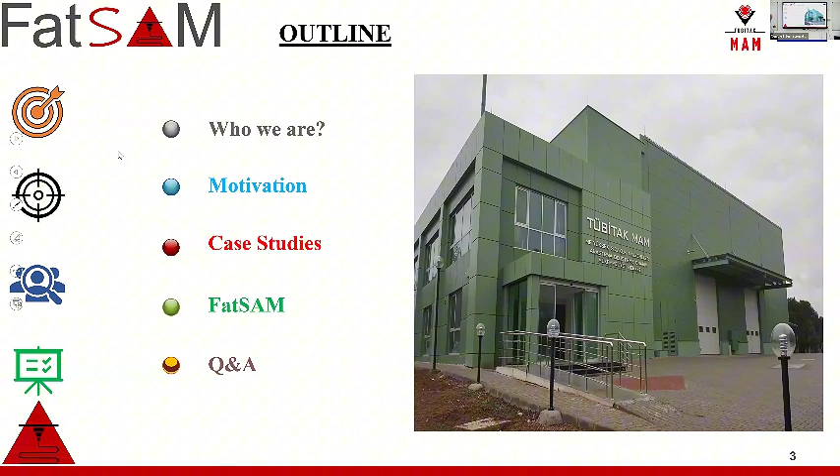So today, what I would like to present you, starting with the outline: who we are, who is the Metallic and Structural Materials Group inside the center, the motivation of this presentation, some case studies mostly in post-processing of additively manufactured metallic materials, then my final case study which I will also present in COMPLAS, and a question and answering period.

So who we are. Before our group, I would like to say that TÜBİTAK is a national research center of Turkey, established in 1972. Currently 17 active groups are working, from food engineers to computational mechanics, from sustainable economy to energy facilities.

We are one of these 17 groups, focused on metallic and structural materials, with 3 teams: casting, structural, and post-processing and characterization. The structural materials group mostly focuses on composite and ceramic materials.

The casting facilities, or casting team, is mostly focused on directional and single crystal castings dedicated to superalloys and advanced steels, contamination-free and fully controlled microstructure, and investment casting facilities at the part-based level.

What we are doing in our team, what I'm focused on, is the post-processing and characterization team: mechanical and microstructural properties of metallic materials for high temperature applications, as well as performing pilot scale production at the part level. We also provide characterization and failure analysis projects.

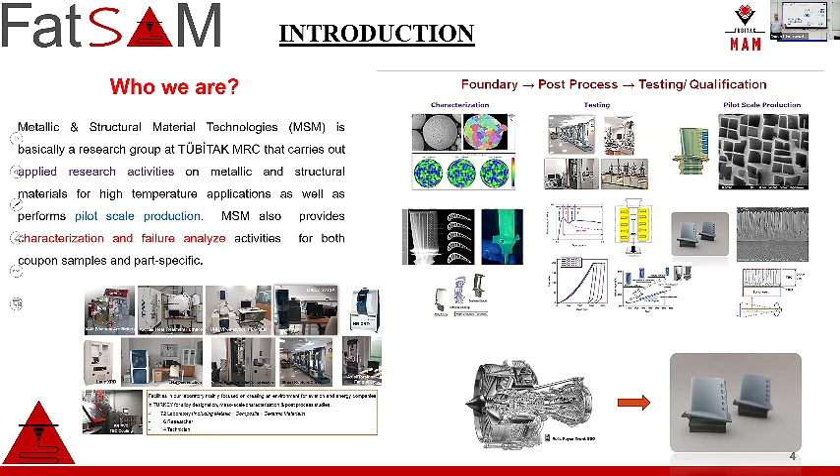Okay, just before the motivation, I would like to give a little bit of background information about what we are doing and what I will present today.

During microstructural driven thermomechanical processing, several phenomena can occur. It can be either hot deformation, or post-processing such as heat treatment and quenching, starting from recovery, reorganization of the grains, not too much change in grain formation or morphology, but release of the residual stresses. Then with further heat, we have recrystallization.

As you already know, with recrystallization we have ordered structure, fine grains, and strain-free morphology. And finally, with heat and deformation, we have grain boundary migration and grain coarsening, which can be very effective in our case for high temperature applications.

In high temperature applications, we are looking for not only an ordered grain structure or fine grains. Actually, we are looking for more coarse grains, which also prevent dislocation motion during high temperature deformation or loading, we can say.

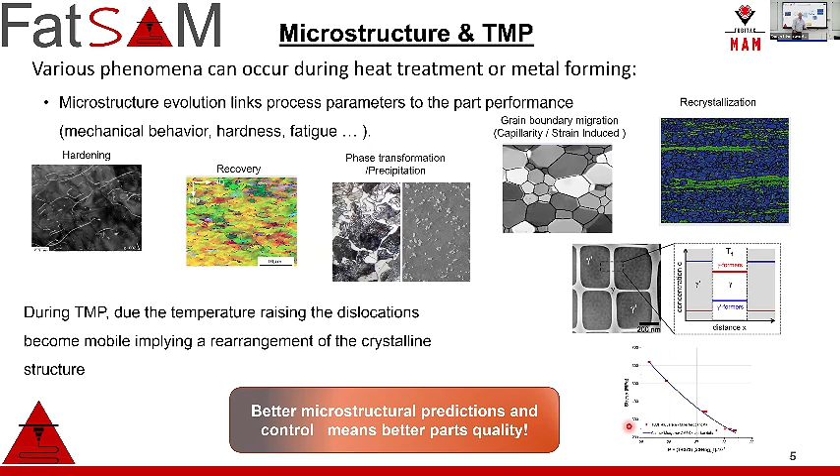So again, another background information about additive manufacturing, because all the case studies I will present today are additive manufactured samples, mostly superalloys. Advantages and disadvantages compared to traditional methods: not a vast amount of production capabilities. There are some multi-material options not available for additive manufacturing, but compared to this, excellent for complex geometries, no support material or shell needed like investment castings.

Good surface finish, depending on the material and process you selected, and post-heat treatment may be required. This is not advantages or disadvantages, but if you are looking for desired mechanical behavior, you have to consider post-treatment applications. The problem in additive manufacturing is porosity. If you are talking of thermal gradient, conventional heat, selective laser melting procedures, you get porosity, lack of fusion.

Melt pool dimensions, and microstructure inhomogeneity, which we can call heterogeneous microstructure, density, fine cellular, because like all welding or joining techniques, they have lack of fusion problems, and due to layer-on-layer powder deposition and conventional heat applying, we have some issues: localized expansion, as well as, because of the rapid cooling, residual stress problems.

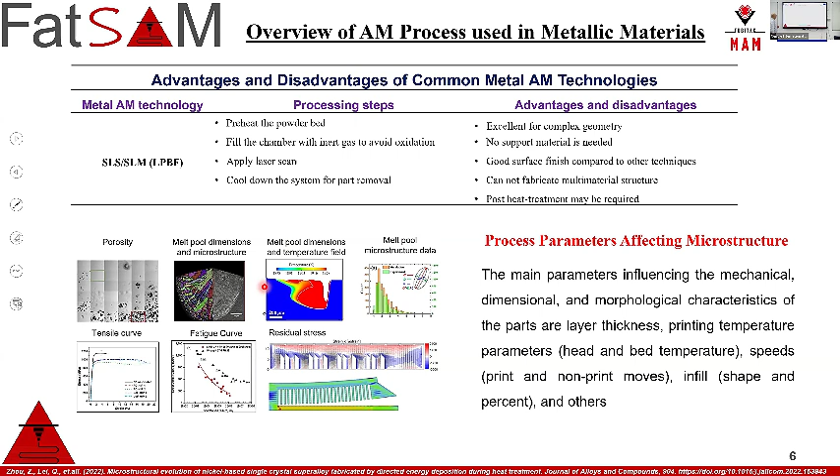So final background information, as mostly already know these things, but I would like to briefly mention creep and fatigue, two different phenomena for high temperature metallic materials. We would like to perform or qualify the materials. One of them is creep, a time-dependent deformation behavior of metallic material under constant load.

Fatigue, actually, probably most of you know better than me, is a form of fracture. You have cyclic loadings, both of them under the yield stresses. One of the most important parameters is critical resolved shear stress in the second stage of creep, because if critical resolved shear stress is higher, it means you have less plastic deformation at high temperatures, and not necessarily, but mostly, you have longer life cycles.

In terms of fatigue, it's a kind of crack formation, and depending on the cyclic loading you applied, you can figure out the moment of crack initiation, then crack propagation, and the end of life cycle.

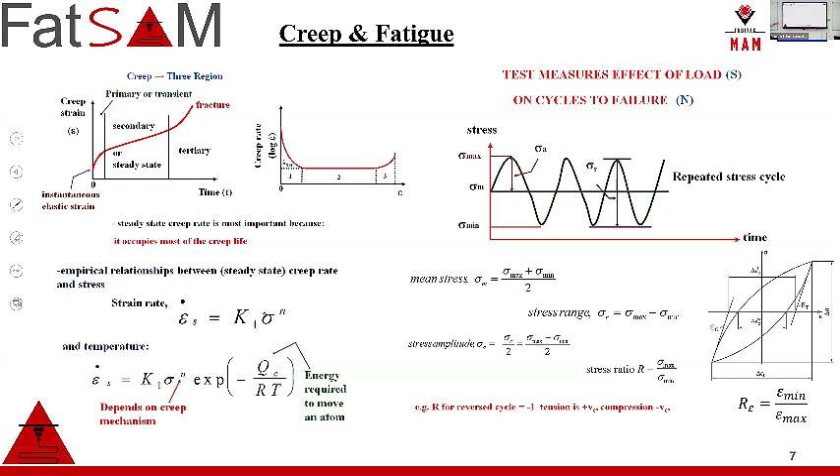So motivation of this finally comes. What we are doing, the first two case studies will be effect of heat treatment. We call this post-processing because for aviation and automotive industry, the industries we are mostly working with, post-processing means extra costs. So it is very important to design a post-processing for a particular part or a coupon sample, it doesn't matter. The first initiation of the industry will be if it is cost effective, if it is optimized.

And if we can, with these cost effective optimized parameters, obtain the best mechanical properties. So we use some thermodynamic simulations, we are expertise in thermodynamic simulations. We design heat treatments in certain cases using hot compression and torsion tests and figure out the interface times. We are also trying to do some rolling and forging process parameters. But at the end of the day, we are trying to initialize to obtain the final microstructural properties so that we can get better mechanical properties.

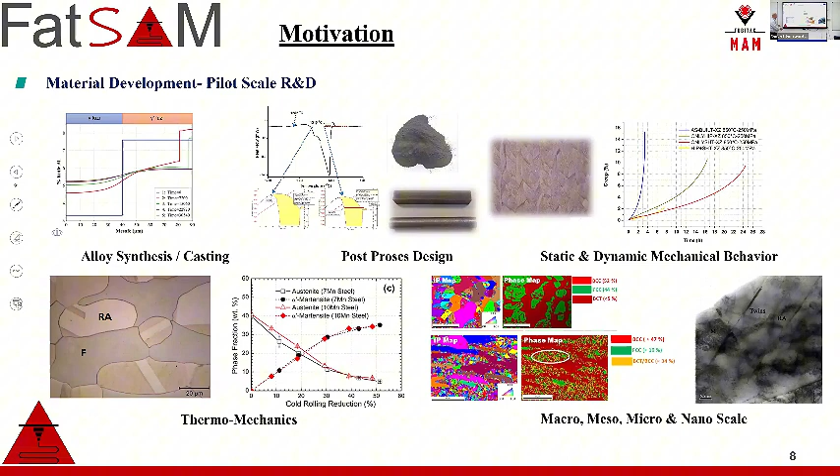So this study, the first two will be already completed projects for a certain aviation industry. One of them is funded by TÜBİTAK itself, because TÜBİTAK is not one research center. In our capital, another TÜBİTAK location we have, which is actually directly connected to the Ministry of Science and Technology, and also it's a public agency.

So as TÜBİTAK MAM, which is in a different location, if we would like to do some research innovation activities, we can also apply to our own center to get some funding, which is also connected to the Ministry of Science and Technology. The third one is European Horizon Widening Program, twinning initiation, partners with CIMNE and LTU. And the second one is actually dedicated to a kind of industrial project.

It's part of a master thesis, and it's totally focused on the heat treatment and creep properties of as-built Inconel 718 superalloys. So, let me tell you about the first study.

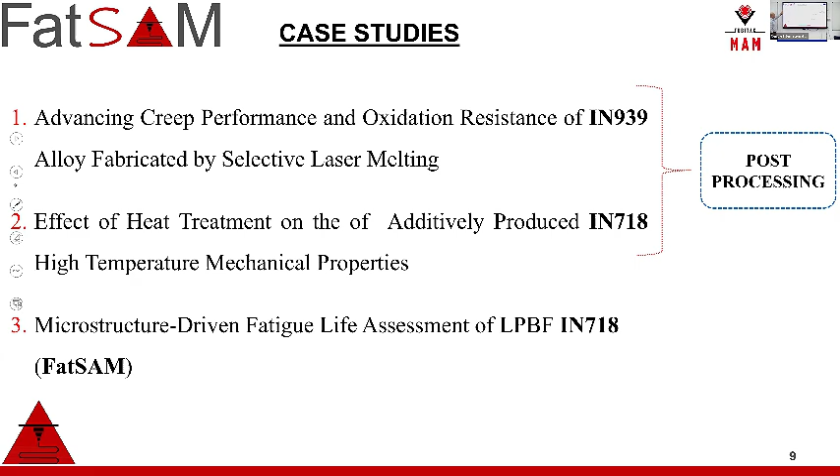The first case is advancing creep performance and oxidation resistance of Inconel 939 alloy fabricated by selective laser melting. It's a PhD study of one of our colleagues in TÜBİTAK. I will not explain the oxidation resistance part because the presentation is already long enough, so we'll focus on the heat treatment design as well as creep performance.

But before that, I would like to mention a little bit about 939. 939 is a very special as-cast material. In superalloys, in the aviation industry, we define metallic materials into two groups. The first one is as-cast materials, which you part cast with investment casting methods in a shell. The second is as-rolled materials.

You cast as an ingot, then forge, or depending on the process parameters, as roll, and finally machine. 939 in this first family is as-cast materials, and what we expect from this, depending on the usage area, NGV, which we call nozzle guide vanes, or blisk parts, is mostly service conditions under high temperatures and constant loads.

If it is nozzle guide vane, around 800 Celsius; if it is this part, around 750 to 720 Celsius. In this project, we try to obtain these mechanical or service conditions performance with additively produced materials. They are all SLM produced, selective laser melting. We have several coupon samples, rod samples, 20 centimeter length, 30 millimeter radius. Then we heat treated them and performed hot tensile and creep tests, and before that, we looked at their microstructures. As you can see, they are dense microstructures, not too much porosity.

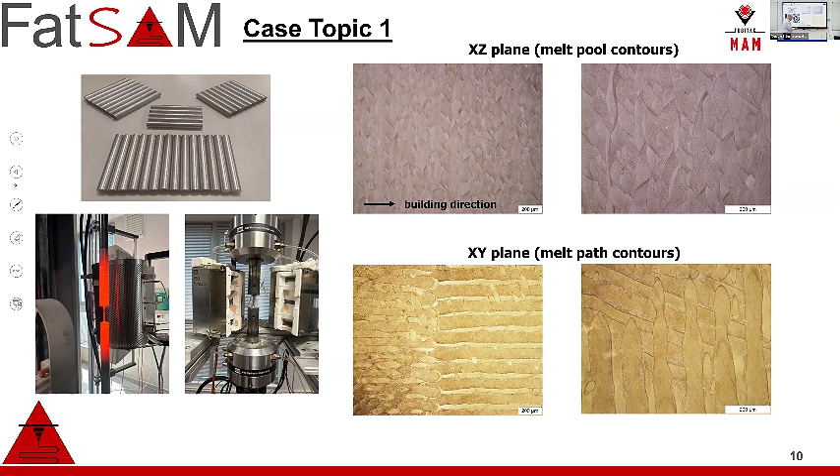So what we designed using Thermo-Calc, and some experimental differential scanning calorimetric analysis, we defined certain transformation temperatures for gamma prime formation, solvus temperature. We also did some experiments on carbide precipitation temperatures.

Three classes of heat treatment procedures: the first is HIP and aging, the other is vacuum heat treatment and aging, and the third is combining HIP and vacuum heat treatment. What is the difference between HIP and vacuum heat treatment?

HIP procedure is a kind of general standard procedure. It has recently become a general standard procedure for additively manufactured materials. It's a hot isostatic pressure equipment. As we know, the physical properties of any metallic material can change as a function of either temperature or pressure, so in this case, we apply both.

If you increase the pressure, the transformation temperatures will decrease. This is a big advantage. You will have a much more dense microstructure because of the pressure. You have ordered structure depending on the isostatic pressure and applied heat, and you don't necessarily need to reach certain temperatures because of the pressure. So it's very advantageous. But does it work?

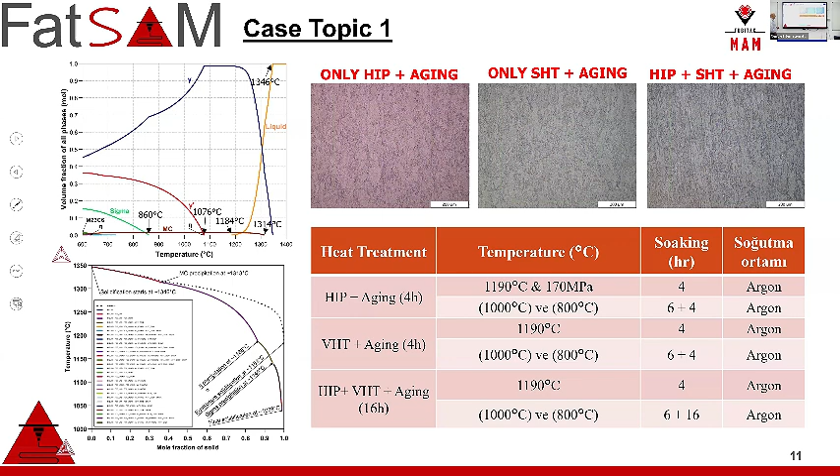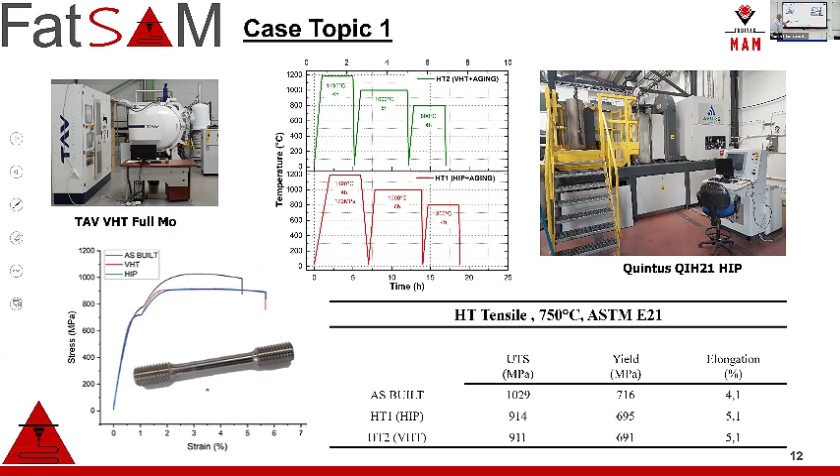So we tried three experiments. Initially we performed tensile tests before passing to creep and fatigue tests. We observed that it doesn't work, so we had to focus more. The basic heat and solution approach as used in SX materials doesn't work. As you can see, the elongation is very low, and strength in the as-built condition is even higher than heat treatment 1 and 2.

That's why we developed several heat treatments with changing duration time, cooling rate, as well as gas fan quenching. Argon gas cooling means a kind of furnace cooling, or stabilizing in the furnace until 850 service conditions, then removing from the furnace and cooling in air. Gas fan quenching is around 13 to 16 bar pressure, which gives close to 113 Celsius per second cooling rate for the material.

So the observations were, yes, we obtained much more dense structures. In some cases, especially HT1, direct vacuum heat treatment, we don't have too much recrystallization. Melt contours are still in the microstructure. There are certain intergranular carbides, but we have the expected amount for 939, more than 65% gamma prime precipitation.

It's good. When we look at the other microstructures, HT4, when we increase the solution heat treatment and decrease the second aging, that's an issue because we couldn't dissolve all the carbides like in HT1, but we don't have too much melt pool or melt path boundaries. We homogenize the samples, solutionize the eutectic regions. We have certain carbide problems, but we have well-seen and coarse gamma prime precipitates.

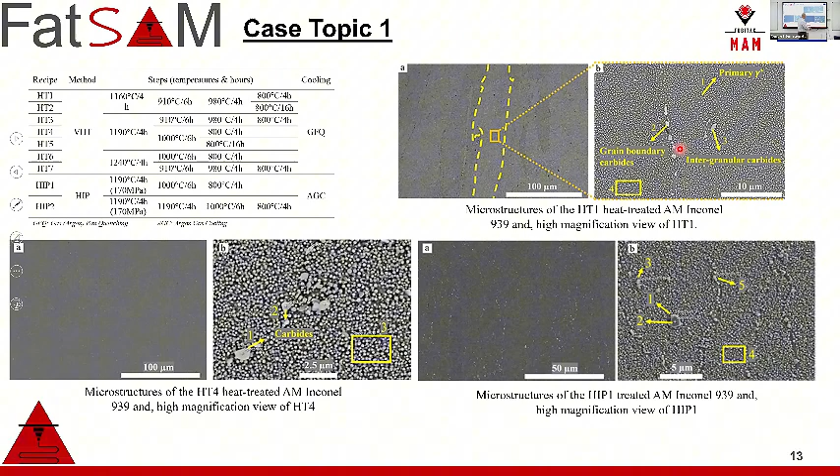In terms of HIP plus vacuum heat treatment procedures, again we see some shadow effect of melt pool boundaries, not newly oriented grain boundaries. In the melt pool boundaries we have carbide phases, but much finer compared to vacuum heat treatment, and gamma prime precipitates.

When we look at the mechanical properties, after improving heat treatments we have better tensile properties even at high temperatures. We increase the UTS around 900 megapascal, still lower than as-built, but the elongation values, especially HT1, HT2, and HT4, are directly oriented to vacuum heat treatment, control heating, and control cooling.

I explained a little bit with HIP, but I didn't explain vacuum heat treatment. What is vacuum heat treatment? In the aviation industry we have different kinds of vacuum heat treatment procedures. You can either use graphite furnaces, there is no resistance heating, graphite, or molybdenum.

Full molybdenum gives contamination-free heat shields in general; molybdenum, pure molybdenum, and heating elements are mostly molybdenum-lanthanum. You have ultra high pressure to dissolve gamma eutectics and carbides or Laves phases depending on the superalloys, and you have a fully controlled cooling environment.

The biggest advantage of vacuum heat treatment is you can continuously heat treat after solution heat treatment, which gives solution strengthening in the gamma matrix. You continue directly to aging steps. You can ultra-fast quench, then go to high subsolvus temperatures to obtain desired precipitates, which is gamma prime in this case.

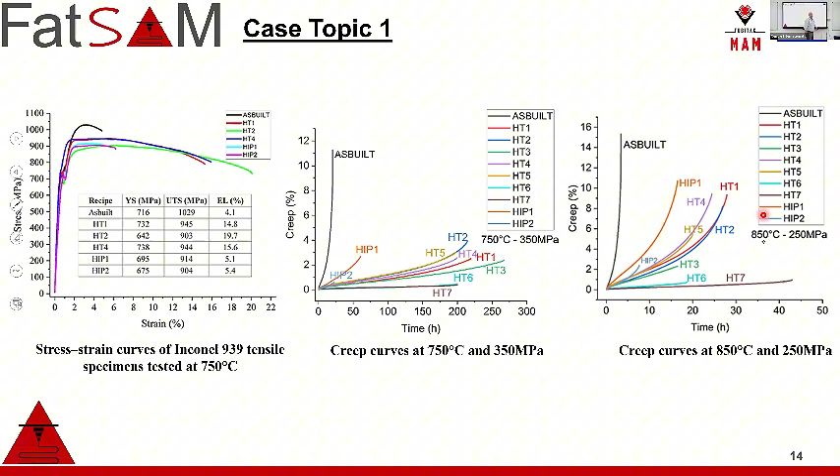As you can see, sorry, maybe not. These small little spherical ones are secondary gamma prime formations, which do not improve but postpone the fracture mechanisms during creep in these materials.

Summary: at 750 we saw dislocation shearing through gamma prime, which is stacking fault formation, or in some cases some superalloy people say antiphase boundary formation, because it's not like steel. These stacking faults or twins can cut through the precipitates compared to steels. They were generally partial dislocations between two intergranular grains, which are austenitic phases.

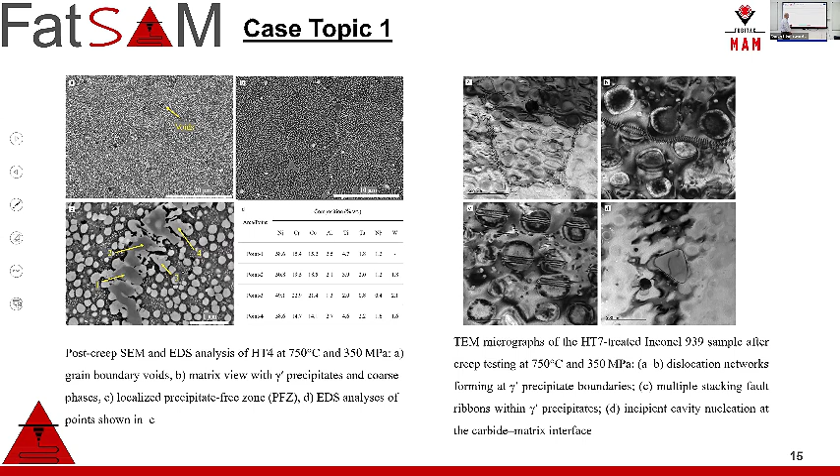But at 850 Celsius, we clearly see the rafting mechanisms, some intergranular cavitation, and micro-crack initiation, which is normal at these extreme temperatures and loads.

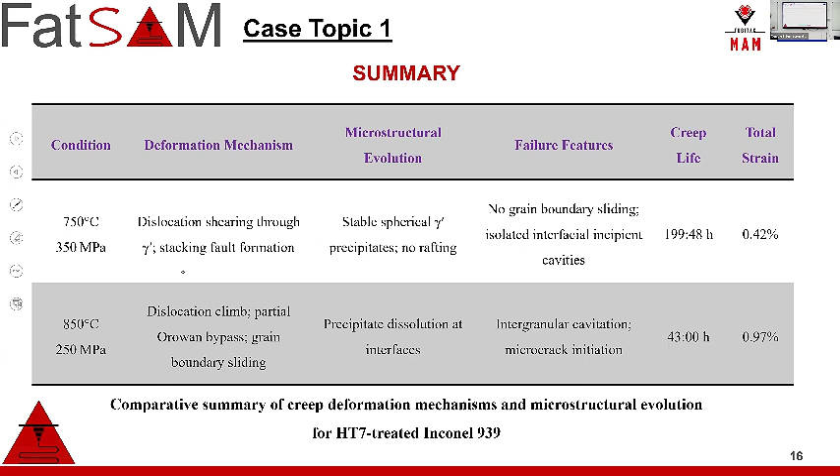So the second one, again, it will be mostly creep and hot tensile. This is the creep equipment we have. In general, high temperature mechanical testing is extremely difficult compared to room temperature tests.

You can do high cycle fatigue at room temperature easily, in mechanical creep, without contacting any thermocouples, as well as without the luxury of contacting extensometers. But for high temperature tests, it's a requirement.

This is a leverage extensometer, which is very specific, dedicated for creep machines. It is much more accurate and reliable than in-contact extensometers. This fully accredited and certified furnace is plus or minus 3 Celsius.

So if you are doing superalloy high temperature creep or fatigue tests, you need reliability. At the end of the day, we produce results for industry, automotive or aviation, or for people like you as an input parameter for your model. So reliability is the most important thing.

This is a kind of different scan strategy, 718. In one substructure, we produce coupon samples, then we look at the microstructures. In the building direction we have melt pools, and in the cross sections we have melt paths.

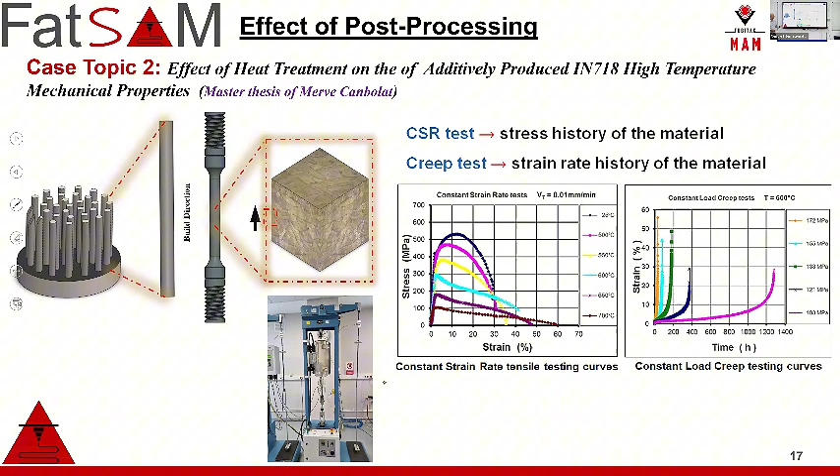So again, some thermodynamic studies, some differential scanning calorimetry analysis. We obtain transition temperatures, we found the gamma prime formation, even gamma double prime, because during temperature and deformation gamma prime is prone to transform into gamma double prime. The Scheil cooling diagrams, which are important, show us which order they will follow. As you can see, gamma transforms first to gamma prime, then with further heat and deformation, to gamma double prime.

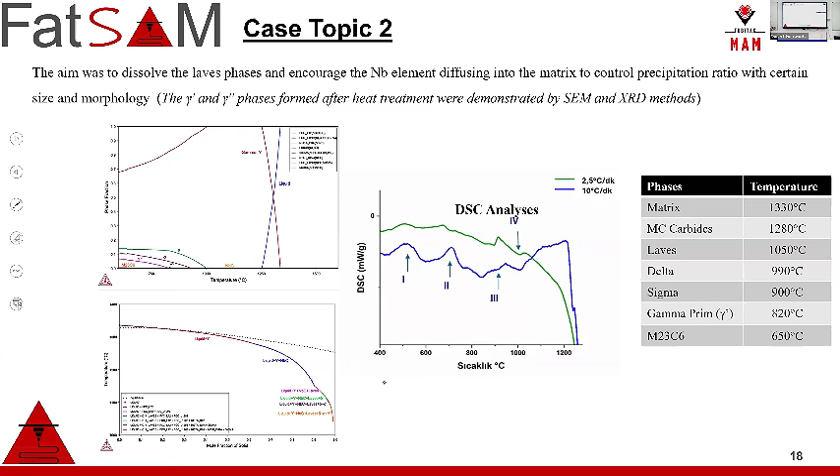The problem in 718, this is a 718 material, as I said before, is the effect of heat treatment and additive porosity in Inconel 718, Laves and delta phases. Yes, with further heat treatment procedures we can obtain better mechanical properties, but there is a risk of formation, according to the Scheil cooling solidification graphs. We observe some formation of Laves and delta phases, which are undesired intermetallics in the microstructure that decrease mechanical properties.

Of these materials, in this study we designed three heat treatments and compared them with the standard conditions. Homogenization, what we call this, is actually a stress relief, because additive manufacturing always comes with residual stresses. For example, I will present a little bit later.

In our case, these materials are the same conditions as some projects, but this was a different project. It's the same equipment, EOS M290, produced with a certain volumetric energy density, same scanning strategy, built in the Z direction. At the end of the day, we observed more than 600 megapascal residual stresses in the not-machined condition. In the machined condition, the situation is different. I will explain in the FatSAM part a little more why.

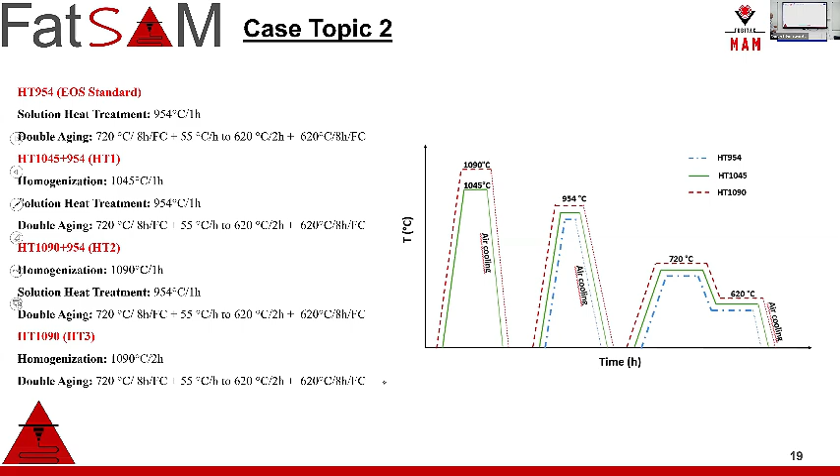Anyway, we look at the compositions. As I said, we couldn't escape the Laves phases, and with creep, even after creep and heat treatment, with Laves phases, we saw some delta phases as well. But after heat treatments, we have much more ordered morphology after homogenization and heat treatment, newly nucleated grains after recrystallization, and even annealing twins because of the annealing. In terms of higher temperature heat treatment, we have much more equiaxed grain formation.

The importance of Inconel 718 and equiaxed grain formation is that Inconel 718, in contrast to 939, is used as rolled parts, impellers, manifolds, or parts working under fatigue force. What you need is equiaxed, not columnar grains, in this material.

So, as you know, we are working on fatigue properties in the FatSAM project. That's why in this project we focus on creep properties. Yes, it is true that these materials are not obliged to work under creep conditions, but we just try to figure out what is the capability of additively manufactured Inconel 718 after heat treatments in creep conditions.

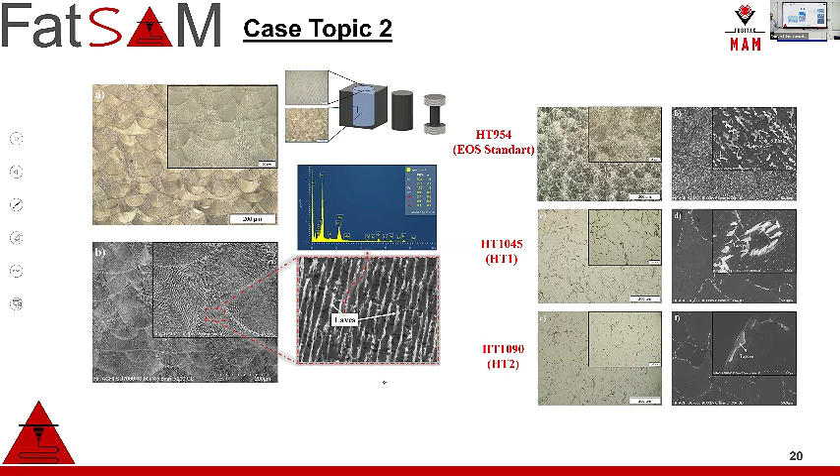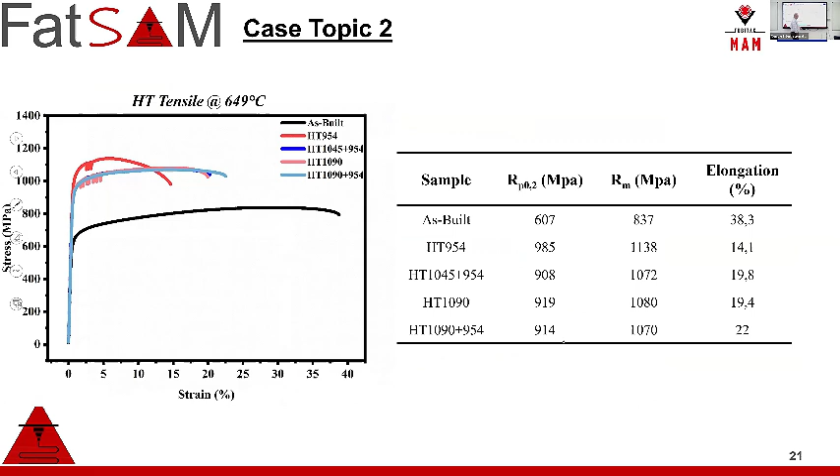So first we did hot tensile tests. Even in as-built conditions, 718 technology in additive manufacturing developed quite fast, with quite good mechanical properties, but we improved their strength much more with heat treatment conditions and optimized ductility. So let's go to creep properties.

As you can see, several properties which I like a lot: 1090, and 1090 plus 954. 954 is actually the solid solution temperature before aging.

The issue is that after stress relief, or homogenization, what you would like to estimate is whether you want to prolong plastic deformation and life cycle under creep, or obtain less plastic deformation during creep. Most people prefer this one, but I prefer the blue one, not the pink one.

In my case, why I like less plastic deformation: the temperature 649 is the service condition temperature, but the applied load for creep test is 650 megapascal. You will never use the material at 650 megapascal. With safety coefficients, the maximum applied load is around 360 to 375 megapascal. So less plastic deformation means you are in safer conditions, with no plastic deformation.

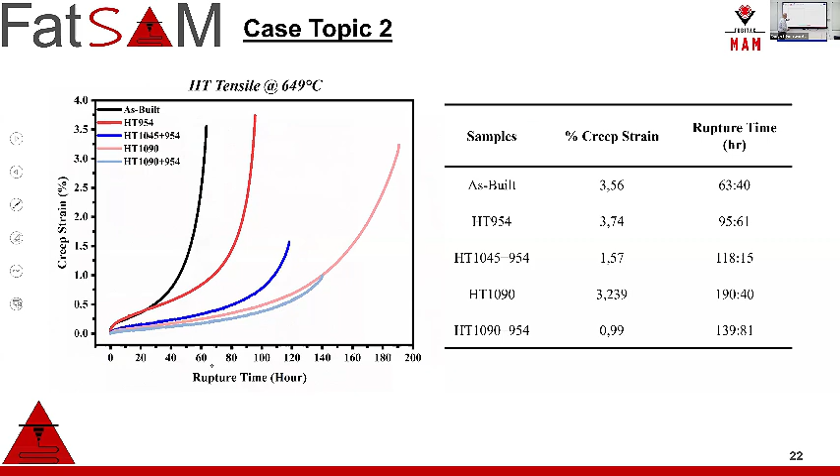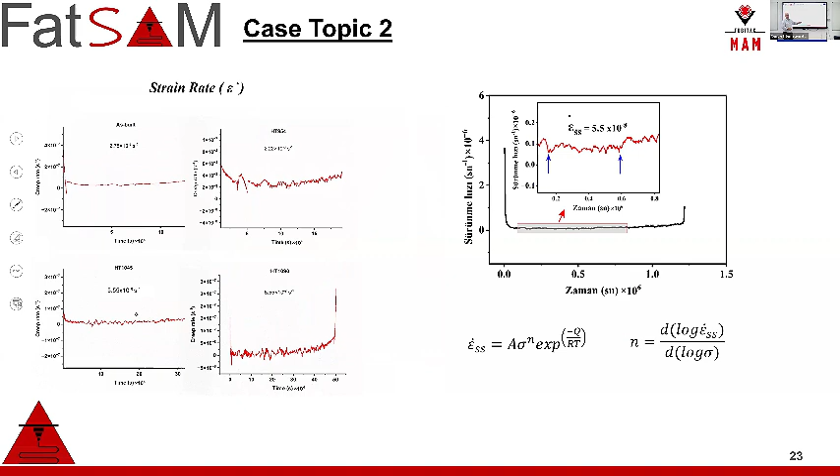For highly elongated samples, you can see this a little bit like HT954, or as-built conditions, but rather than this, there is too much noise to calculate the steady state creep rate.

I'm stating again and again this point, because in casting, we have an opportunity to remove these phases with special casting equipment like vacuum induction melting. And before that, if you do vacuum arc melting to remove phosphorus and sulfur, it will be even better. So triple melting is the best method, providing contamination-free, intermetallic-free microstructures. But still, additive manufacturing has issues with these.

I would like to stay just one more minute on this result. The biggest problem in additive manufacturing is that we cannot use the same material composition as in casting and wrought processing. So especially for face-centered cubic materials, like nickel-based superalloys, we have to make them weldable. So what we do is increase the chrome ratio a little bit and decrease the carbon a little bit, which can be seen.

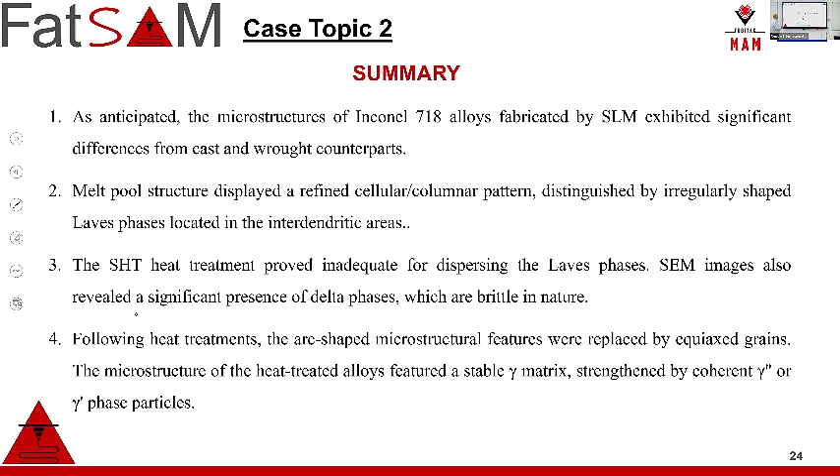I'll keep it a little faster because it's a very long case study to present. What we are doing in FATSAM, just for motivation: we have three partners, LTU, CIMNE, and us. We are applying mostly experimental features and providing data for CIMNE and LTU.

LTU does the AM calibration, CIMNE does the upgraded fatigue model for these materials. I say upgraded because most current studies are high cycle fatigue. In this project we will do low cycle fatigue, which is strain controlled, plus elevated temperatures - 3 different temperatures in addition to room temperature, so 4 total, plus 3 different strain rates. So we multiply for each temperature with 3 different strain ratios.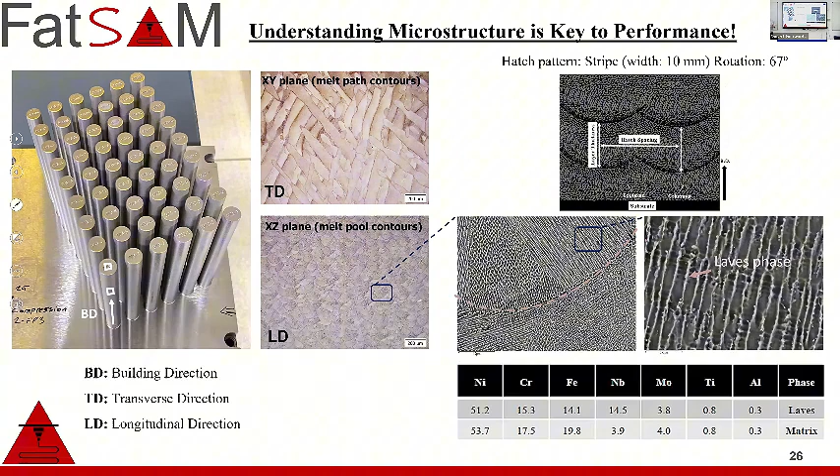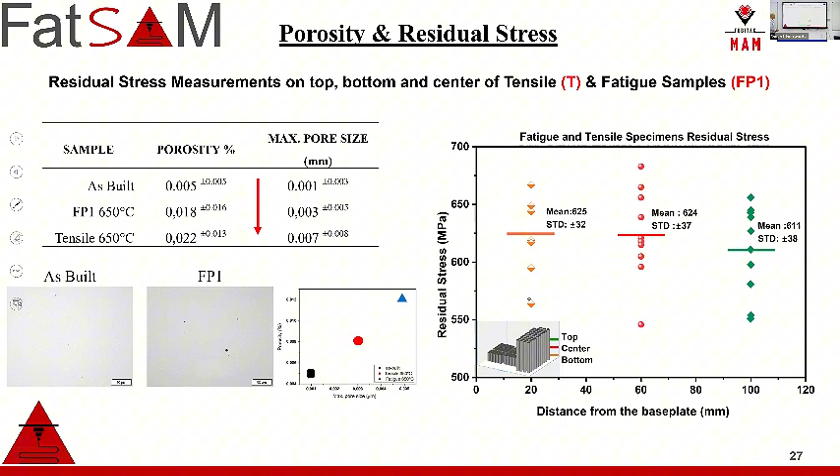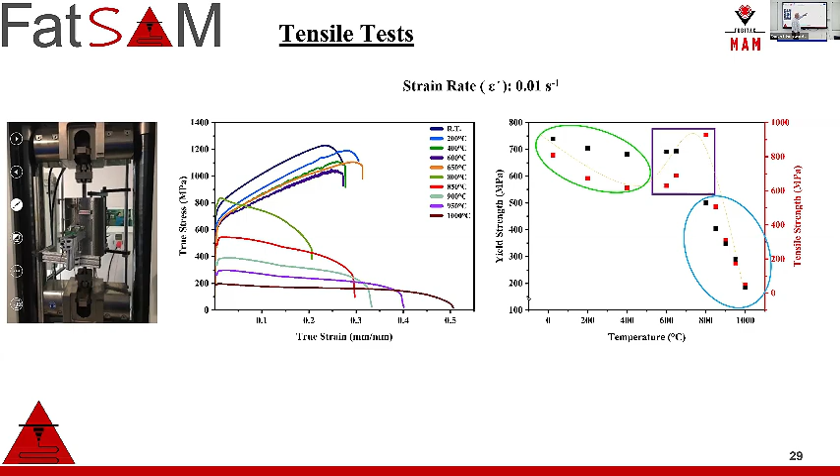Tensile results are quite good - even with increasing temperature, there is more than 50% elongation. This is because in our previous 718 projects, we never scanned that much area to obtain the fatigue matrix. We observed that around 750 and 800 Celsius there's a slight microstructural evolution, which we haven't confirmed yet, but it's probably due to dynamic recrystallization under temperature and loading. We see an increase in strength and yield of the material, and extremely decreased ductility, even lower than at lower temperatures. This is probably strain hardening of the material due to dynamic recrystallization, because the service condition of this material is 650 Celsius and we tested up to 1000 Celsius.

So these are the basic fatigue results we've got. Our software can provide history of stress versus cycle, or strain and amplitude versus cycle. We also have various strain control parameters. We use contact extensometers, 3 thermocouples connected to threads at the center of the materials with minus plus 3 Celsius accuracy, and cooling in the grips.

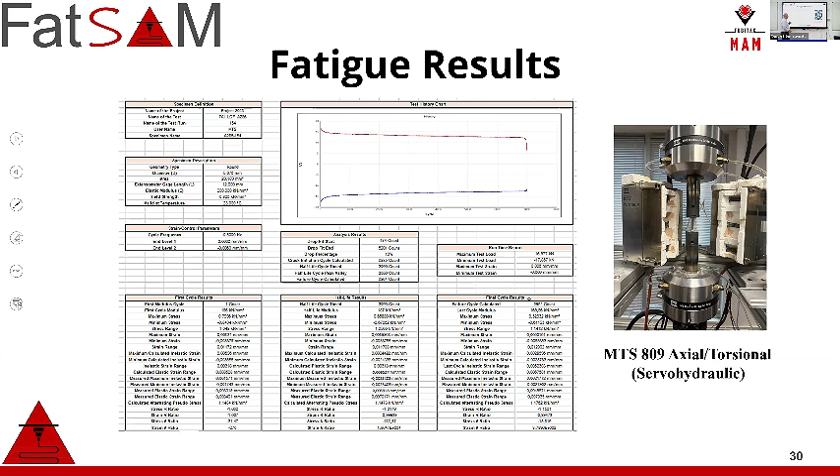For each hysteresis, the advantages of strain control test and extensometers are this: just tell me the cycle you want to see, and I can show the hysteresis loop, or strain amplitude and stress amplitude, with displacement ratio or strain ratio. This is the biggest advantage of using extensometers and thermocouples.

With increasing temperature, we observe that the strain energy is increasing. This is due to some cyclic hardening; at 800 Celsius, we have less strain energy than at 650 Celsius. For the first and half cycle and crack initiation, when we obtain higher displacement at 800 Celsius, which is expected.

And even at room temperature, at low strain levels, we didn't see any deformation, but for high cycles, because this is quick, after a certain amount of time, it's uncontrolled deformation mechanisms for fracture mechanism for these materials.

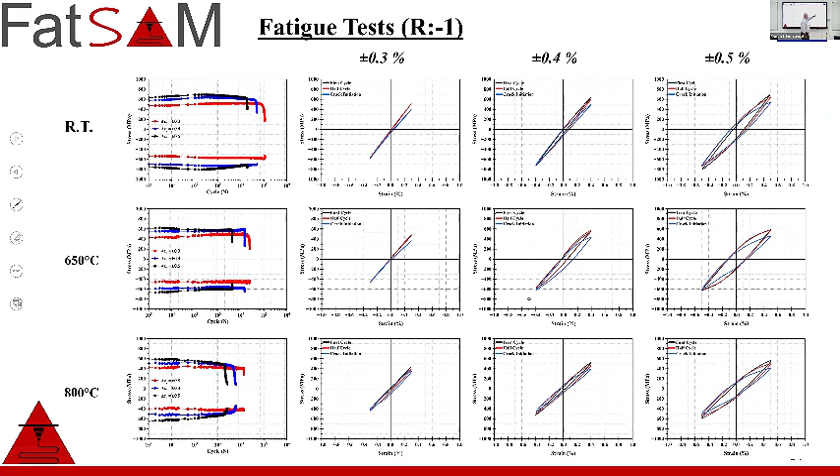I will show some microstructures, and with the strain ratio increase, some strain energy is observed from first cycle to crack initiation area. These are the strain rates calculated for each material, and crack initiation cycles.

In general, most studies use half life cycles for predicting fatigue life of the material. But with this kind of equipment we have, we can also provide you the crack initiation cycle. And with crack initiation cycle, we can see the softening hardening ratio above zero.

As I can say, the most interesting one is here. This is 800 Celsius, and it is all stable in this softening region, and then suddenly drops. When we look at the number of cycles and stress amplitude, we will improve this graph.

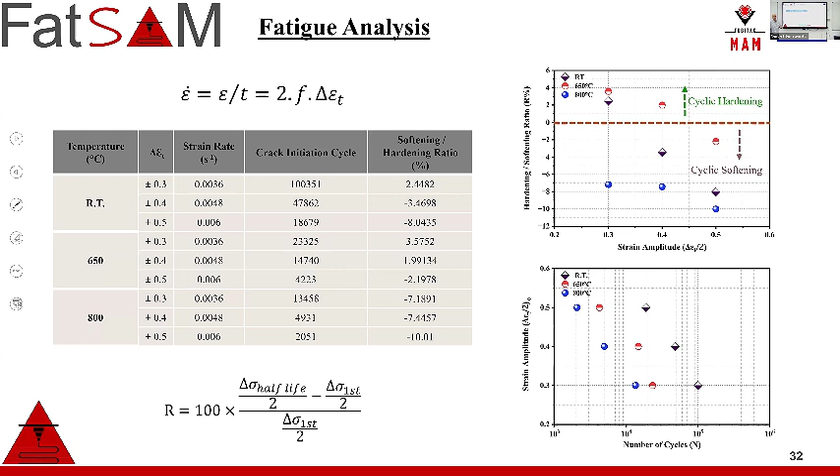Two things are important. In strain control low cycle fatigue tests, you don't necessarily need to obtain an SN curve. In general, we use SN curves, isn't it? But here, you can obtain an EN curve, which is, I believe, much more useful if you are doing some ANSYS design for a specific part or something like that. And that's the biggest advantage.

I can go to the fracture analysis and complete it, because we are almost done.

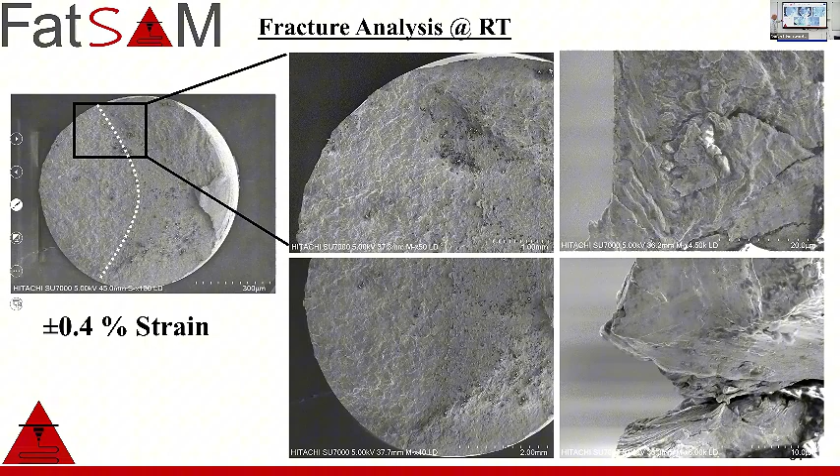As you can see, the room temperature crack area started with different areas. There is a crack initiation and crack propagation region, but after a certain amount of time you have an unpredicted failure start and catastrophic fracture. So at 650 Celsius, same strain ratio, we have less area, but we clearly know the point. In general, microcracks follow through the melt pool boundaries, which is expected, which is a hot delamination for SLM-built structures.

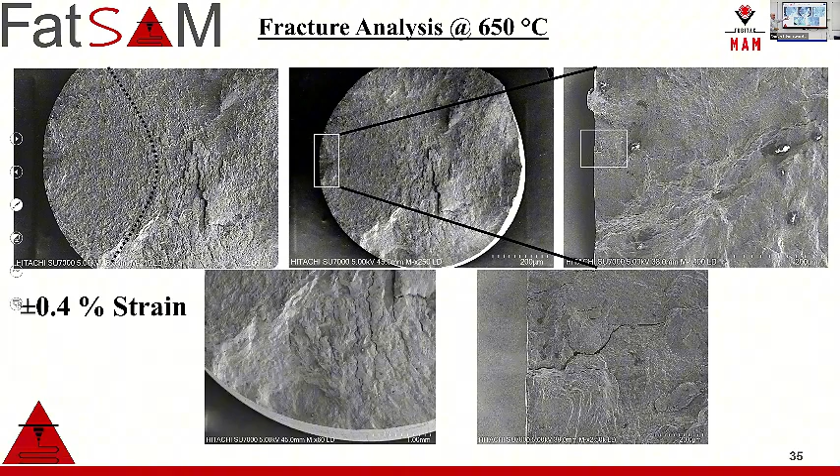This is no heat treated. For some, there is no heat treatment, there is no post processing. And we want to look at a little fracture analysis in macro regions, to obtain what we see is strain with increasing strain ratio. We have much more ductile and shear active fracture mechanisms.

The most interesting one, which I like, they call this strain stripes. Some people say diffusion bands, dislocation bands. I would like to say dislocation bands and hot tearing. I would like to say delamination.

Why slightly different? Let me show you pore - mostly lack of fusion, not gas pores. Through the flow of the gas, intergranular melt pool boundary - not the boundary, intergranular melt pool boundary - and it delaminates at the center of the material. It's a highly dislocation localized zone.

As you can see, this is melt pool boundary. I can show you like that. And these are slip bands, which delaminated or teared intergranular of the melt pool boundary. It is very interesting because most fatigue tests don't show that.

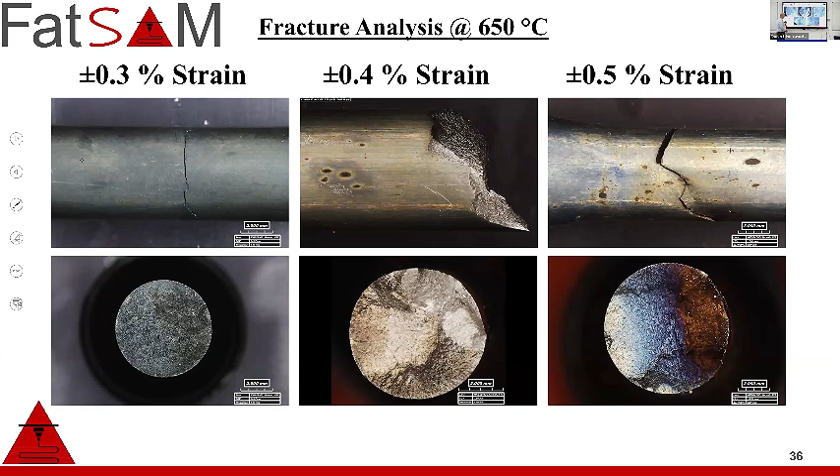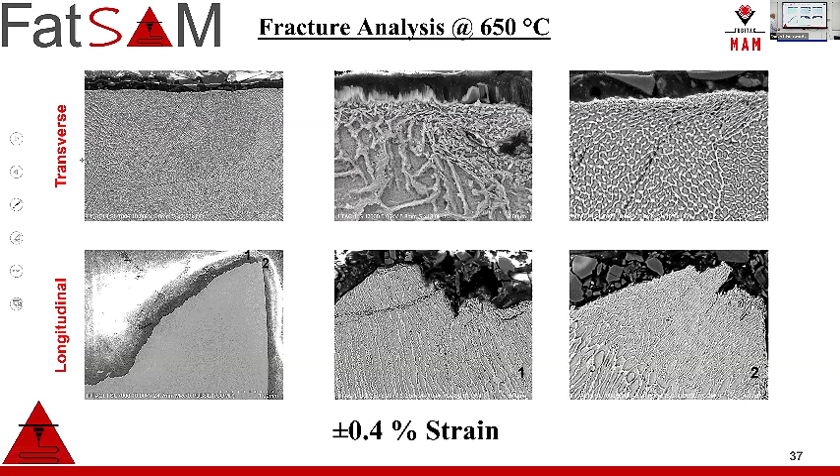People started to comment easily on the previous picture, because you need to go much more deeper - melt pool boundary, macro crack initiation. But when we go, this is again 0.4%, but at higher magnification and different scanning area, we will see these are slip bands and hot tearing regions.

So there are 4 different results. Fatigue crack origins primarily involve printing defects such as lack of fusion, gas pores, particles, or microstructural inhomogeneity, but the crack propagation region exhibits a mix of fatigue striations and ductile tearing. This is one of the first observations, and there are only 1 or 2 literature studies that mention it, but not detailed research about it. Also, specimens displayed cleavage crack initiation at high temperatures.

Crack initiation sites were found to be connected to adjacent sites via shear lips, which merged to form larger cracks that propagated through the material, which is normal for any additive material at high temperature applications and fatigue tests. So this is what we'd expect. And again, the microstructure was displayed as a refined cellular columnar pattern, distinguished by irregularly shaped Laves phases.

Final comment: in Inconel 718, in this project we are focused on as-built condition, without any heat treatment or post-processing. You cannot escape as-built condition levels and the databases in Inconel 718 or most of the other metallic materials.

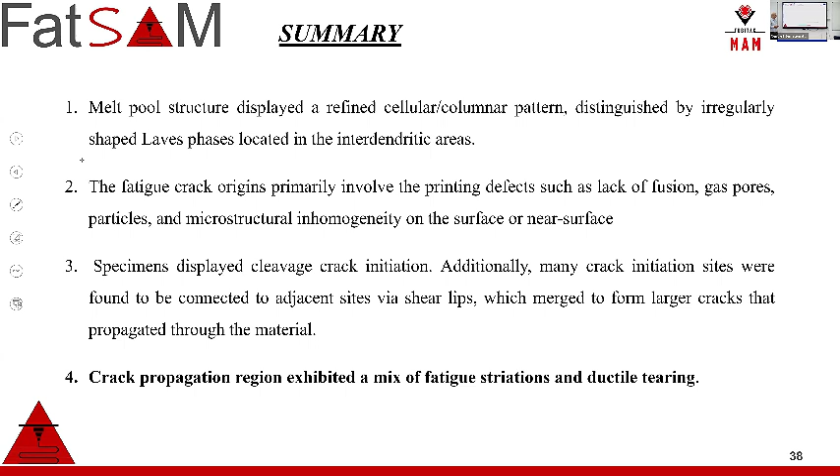Thank you, Hüseyin, for the presentation. It's one, so we have time for a couple of questions maybe. And if any, here in the audience, I'm not sure if somebody from home. If not, I have several comments, we can discuss them during lunch.

Okay, I would like to ask you a question about the feasibility of applying certain of the heat treatments that you mentioned, that you're applying at a sample level, then to component level. And if you can demonstrate the effect that you have observed at sample level can be obtained at the component level.

Actually, as I said before, the second case was for an industrial support project. We already obtained results, and they are applying some of the heat treatments, including 718, which is the most widespread superalloy in the aviation industry. Honestly speaking, they are not using it without any heat treatment currently. But most of the literature studies are now in as-built conditions plus machining, because post-processes bring much more cost. And as you say, for Inconel 718 including stress relief, you have 3 or 4 step heat treatments. Nobody wants to apply this.